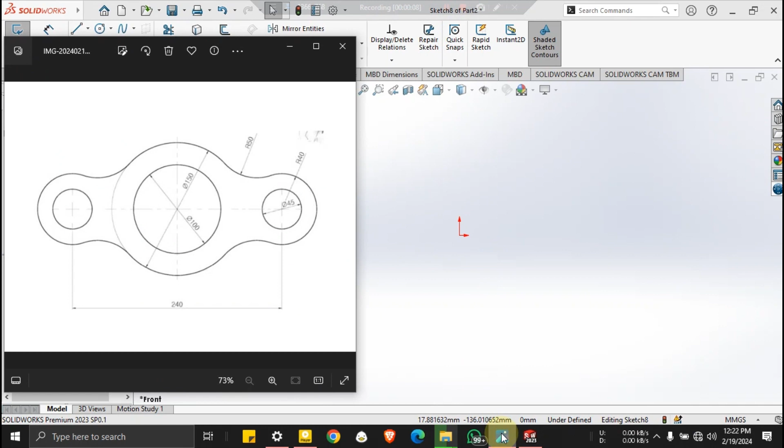Very simple 2 minutes drawing here that we'll be trying on. You can just memorize this as we draw. You can take a screenshot and then continue. So in our front plane, I'll create my midpoint lines as usual, the horizontal and then the vertical one. This is not needed, so let's just delete this.

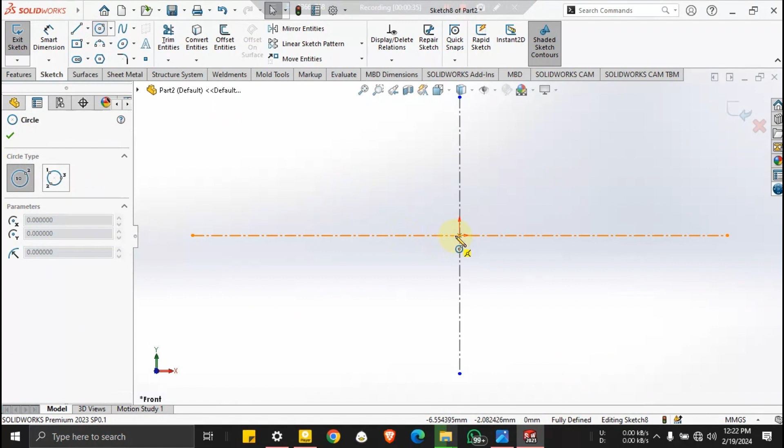Then we have 2 circles in the middle here, and that will be 150 and then 100 radius. So 150 and then 100 radius, diameter, sorry.

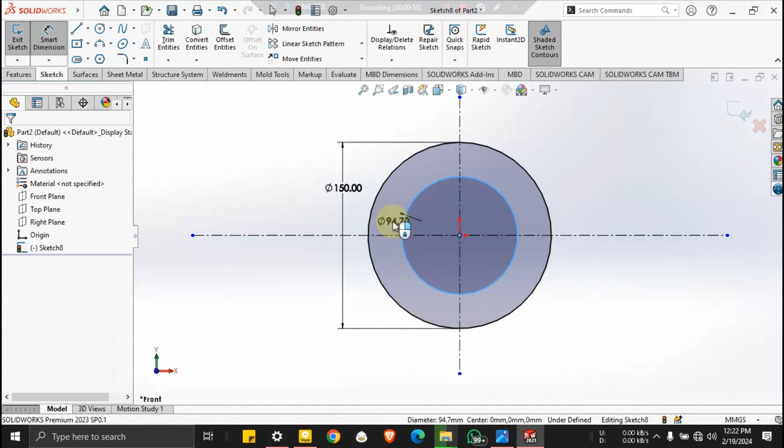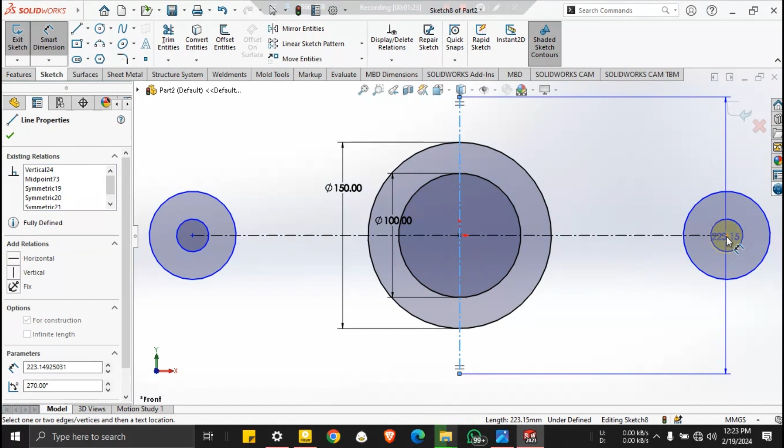To make things faster, let's use the dynamic mirror tool. We select this and then let's draw 2 circles over here. Let's draw a second one, and this has a distance of 120 from the center.

A radius 40 and then diameter 45. So we use this as our radius 40 times 2. Then we have our diameter 45. We use a 3-point arc for this. Select this, and then this has a radius of 50 if I'm correct. Yeah, and then let's not forget to add our tangent relations.

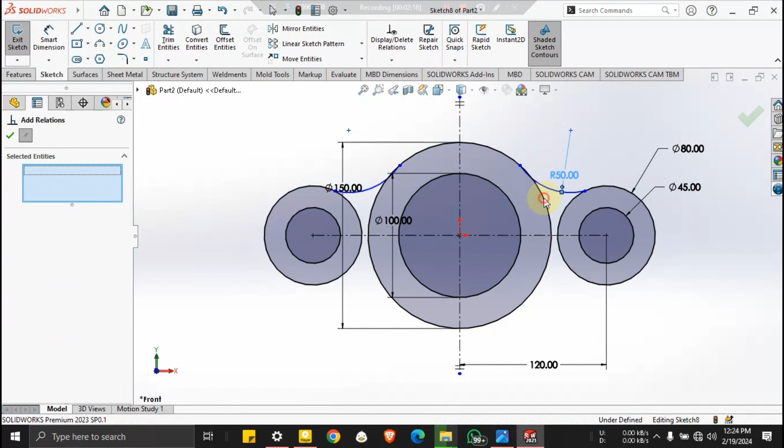Add the first relation, and then add the second relation, and then we mirror this. So we select this, then you mirror it about the horizontal line, then we mirror this one too about our horizontal line.

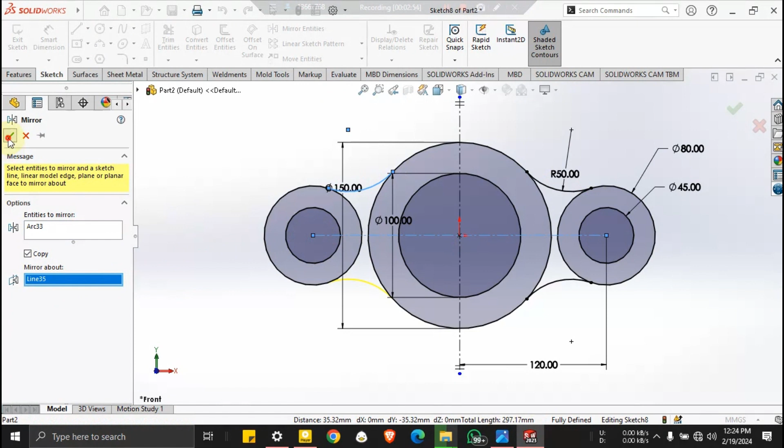Let's go ahead and then trim these from there. Once you are done trimming, we are done with our drawing, and you can see it's fully defined. Zoom out, and then it's a very simple drawing that can be done in less than 1 minute.